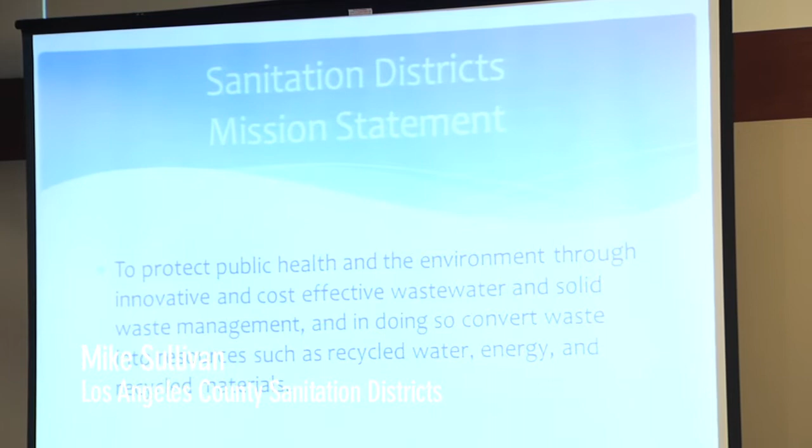Okay. So the sanitation districts, kind of our role, obviously the tie-in here is recycled water, and we'll cover a little bit more about that towards the end. We were established in 1923 basically to help manage the wastewater and solid waste needs for the people in Los Angeles County. So we're comprised of 23 independent special districts that cover about 815 square miles and 78 different cities and a population of over 5 million people. So we're a pretty big organization.

We have about 1,800 or 1,900 employees operating a number of different facilities and about 250 engineers, to kind of give you a grasp of our operation. But we're here to talk about recycled water, of course, but a little bit about our agency first. So this is a map showing our solid waste facilities. So we operate 3 different landfills. Those are the blue circles.

We have some closed landfills that we monitor, 3 materials recovery facilities, and this is kind of key with the theme of our agency to reuse, recycle, and repurpose everything that we can, and a couple of waste-to-energy facilities. So up in the left-hand corner there is Puente Hills, which is the largest landfill in the nation. And next to that on the right is our newest materials recovery facility, which is over 5 acres.

And overall at our different facilities, we recycle everything we can. Green waste, appliances, concrete, wood waste, tires, everything we can pull out of the waste stream we do. And again, we have 3 different materials recovery facilities where we're doing that sort of thing.

Trying to go quickly here, but the Puente Hills landfill is going to close fairly shortly, so we're actually moving ahead with siting and developing remote landfill stations where we would haul the material out by train, which again means greater emphasis on recycling and recovering as much as we can before we have to haul that material about 200 miles one way down to Imperial County.

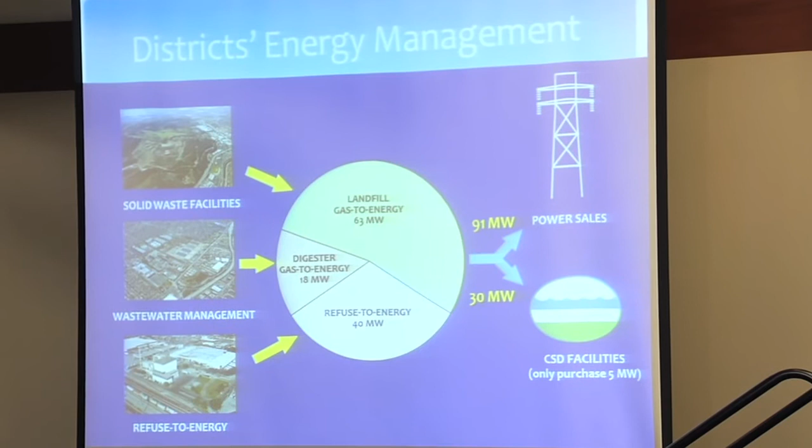We also produce a lot of energy, so at our landfill operations, the organics in the landfill that do get deposited break down. We actually have huge fans that sort of pull a vacuum on the whole landfill, and we collect all of that gas and make power with it. At our wastewater facilities, we digest the organics that are in the waste stream, make power with that, and then we have the 2 waste-to-energy facilities. So we're talking about 120 megawatts of power.

So our facilities, I don't know if you can see it up on the right here, we only use about 30 megawatts of power. So we're not just off the grid. We're starting to help power the grid. And that's something that we try to maximize wherever we can. So that 90 megawatts of power that we're putting into the grid is enough to power almost 100,000 homes.

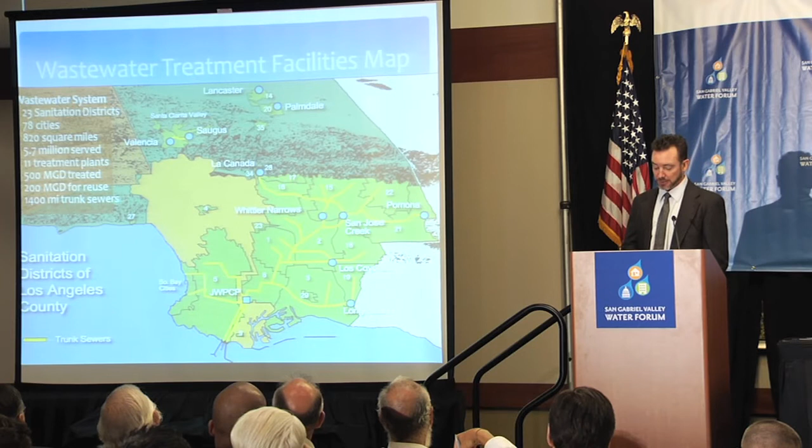So to get to the point here, this is our wastewater facilities map. You can see the blue circles here are our water treatment plants, and the yellow lines are our main trunk lines. So we've got treatment plants. We have one up in La Cañada that's about 200,000 gallons a day, all the way up to the JWPCP, which is down there in Carson, a 350 million gallon a day plant.

So we have a wide range of plants, with the JWPCP being our main ocean disposal facility for all the water that we're not using upstream, and the blue circles there are water reclamation plants we developed upstream to try to reclaim water so that we can use it in the areas before it all flows downhill and you'd have to pump it all back up again.

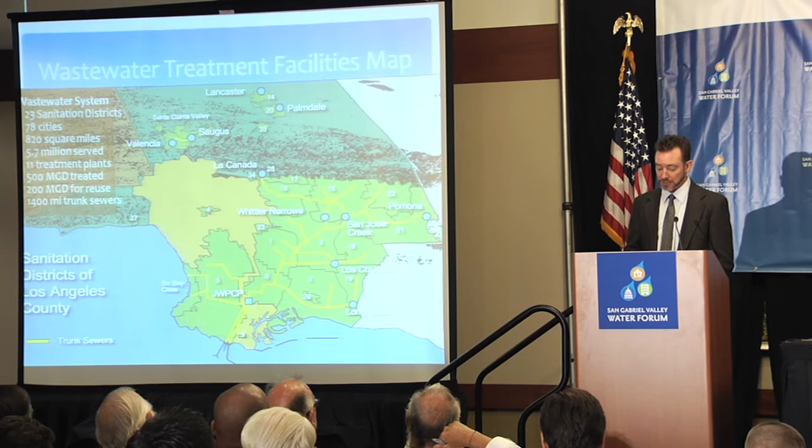So our overall system capacity is about 650 million gallons a day. We're only treating about 500 million gallons a day right now. There's 1,400 miles of sewers and 52 pumping plants that we also operate. The recycled water portion of that is 160 million gallons a day of water that we're treating to reuse levels, so that could be reused. We're actually reusing about half of that, which is still pretty good, 80 million gallons a day.

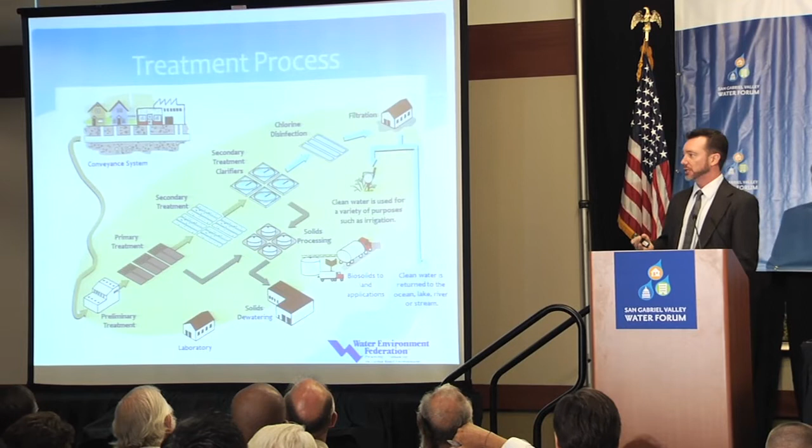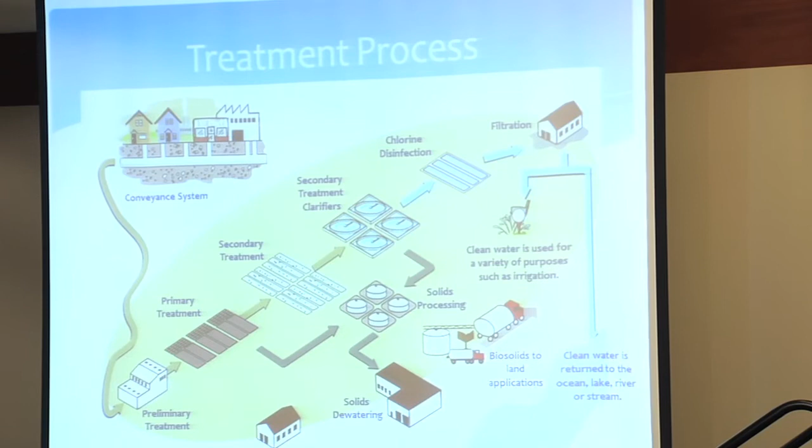So how do we actually do that? This is a simplified graphic of a wastewater system, and we have a big mix; it's not just homes, but industry and commercial businesses. It's probably closer to a third of each, so it's not all coming from one type of source. At the treatment plant, there's preliminary treatment, which is a screening process. Primary treatment is a gravity-driven process.

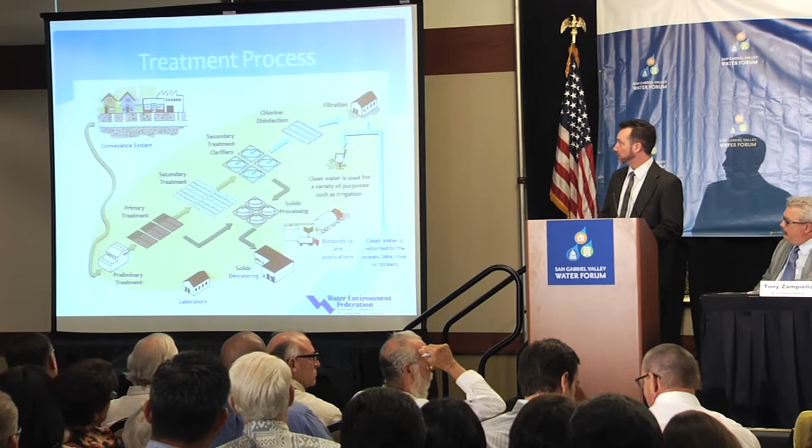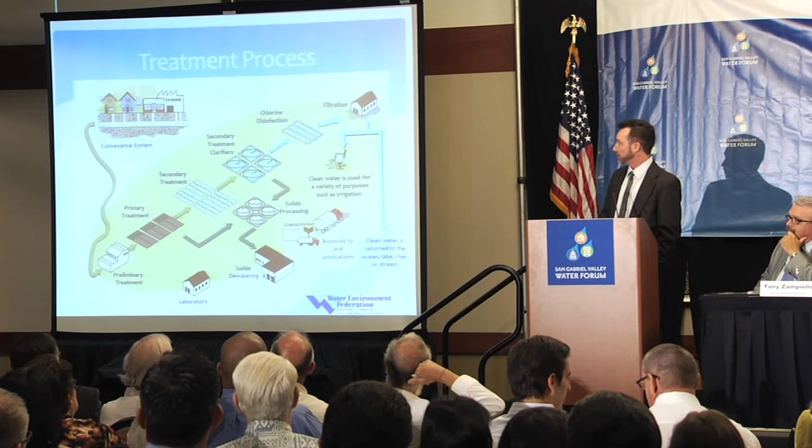Secondary treatment is a biological process where we actually develop biological communities that will consume the organics so that we can then settle those out in the secondary treatment clarifiers. It's a little bit out of order, actually. The filtration would come after secondary treatment. Filtration being huge beds of media like sand or carbon that further clean up the water, followed by a disinfection process where you've essentially almost got drinking water quality at that point. At that point it's available for reuse.

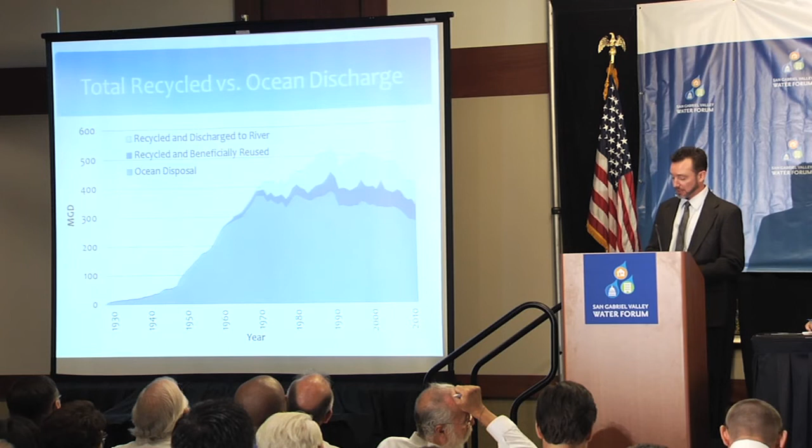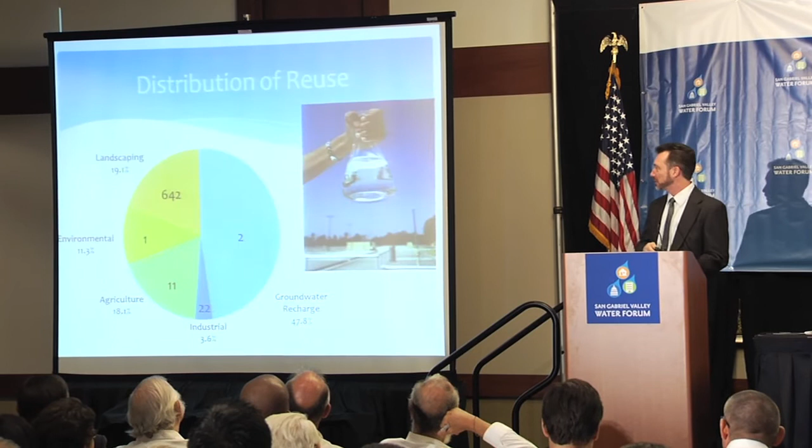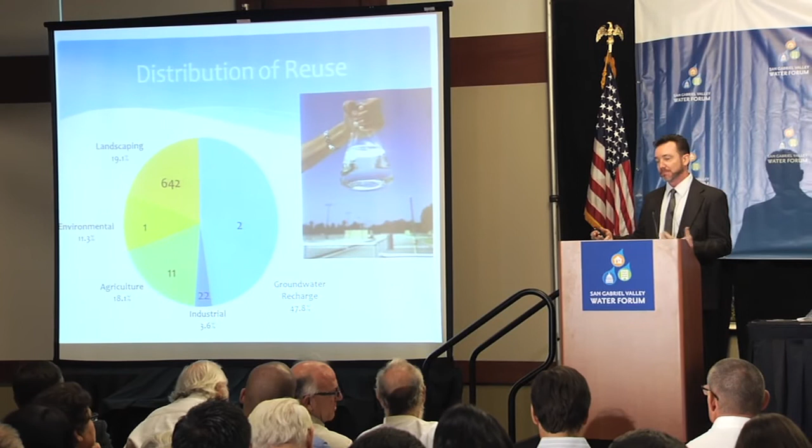So why aren't we using more of the water? If you look at how much water is actually used, this is for all the water that is beneficially reused, where does it go? So you can see for groundwater recharge, we have 2 sites, but it's almost half of the water, because Department of Public Works is able to move the water and get it into the basins and capture a great deal of it, whereas in landscaping there's 642 sites, but it's less than 20% of the water. So landscaping, you're watering maybe once a day, maybe twice a day, so the volume of use isn't quite there.

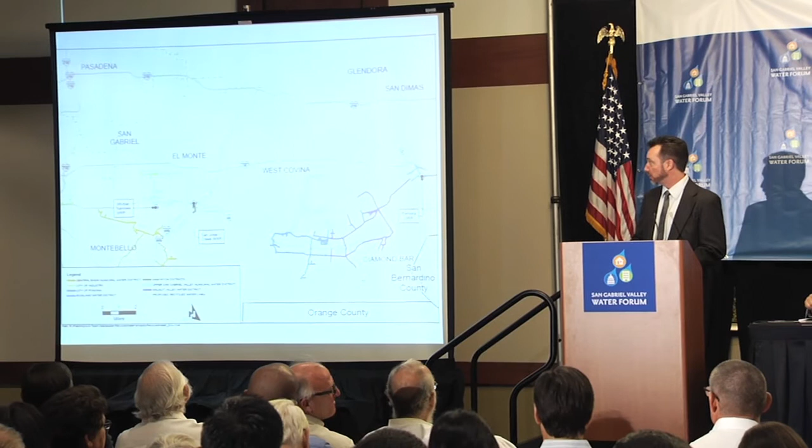This is a picture of the San Gabriel Valley. You can see the 57 freeway on the right, the 605. Just to orient you, those are our treatment facilities. They are the circles with the black dots, so that's Whittier Narrows all the way to the left. That's the oldest water reclamation plant. San Jose Creek right at the junction of the 60 and the 605, and then the Pomona WRP all the way out here on the right.

And then you can see coming out from that these networks of piping arrangements. So this purple pipe is put in to use the recycled water for, as Tony mentioned, direct reuse. Direct reuse means something like irrigation or industry, not groundwater recharge. So there are limitations on how much you can do. It's much cheaper the closer to the treatment plant you are. You don't have as much pipe to put in to reach users. The farther out you want to get, the more expensive it becomes.

But there is an intricate network, and you can see the dashed lines there are proposed, eventual planned areas where recycled water piping could be put in. Just to note, all the way out here coming from the Pomona WRP, Bonelli Park, which is adjacent to the Fairplex complex here, is irrigated with recycled water.